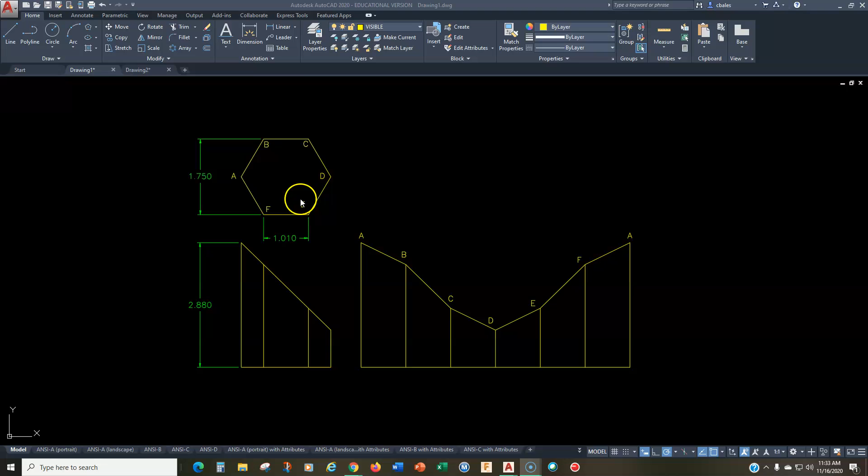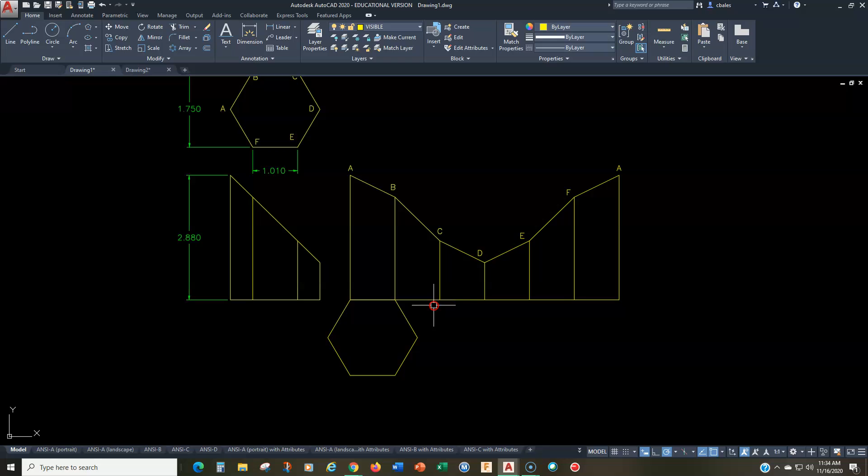All right, so the bottom of the hexagon is very straightforward. The bottom of this is essentially a regular hexagon. We've already created the bottom shape right there. We just have to copy it and move it in location. So I'm going to use the copy command and pick the object right there. And we can choose any of these edges to put it on. So I'm just going to put it right there, because that seems like a logical place to put it. And there we have our bottom.

Now the top is a little bit more challenging, conceptually maybe, to see what we're talking about. The top is a hexagon, that's not doubted. But because it's a truncated hexagonal prism, the top shape is basically a smeared out hexagon. So we have to notice a couple things to get this created properly.

The first thing we're going to notice are the two sides that are equal in length and equal in, I guess you could say, angle. The sides right here, which are basically E and F and B and C. So we can see B and C right here and E and F are equal in length and in angle, okay? So we're going to use that as our basis for the creation of our top surface.

What we also notice is the distance between E and F and B and C is precisely 1.75 inches. That's the width across the flats. It is also the distance between AB and CD and AF, but we're only interested in BC and EF. So that 1.75, and they're parallel. So what I'm going to do first is offset this line 1.75 to create a parallel copy. So I'll go to offset. 1.75 is already there, and I'll offset that line right there.

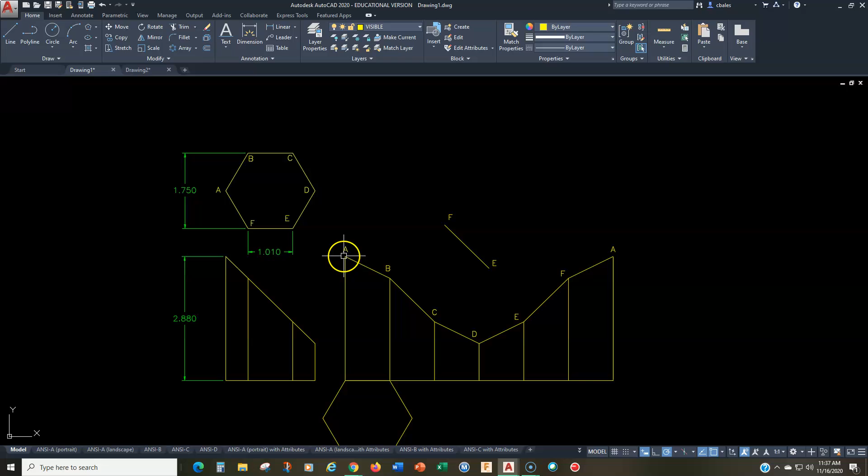Well, if we were drawing this by hand, we would use a divider or a compass, and we would strike an arc from B equal in radius to BA. And we would do the same for F to FA. And since they're the same distance, where they intersect would be where our line ends. We can do that in AutoCAD using the circle command. Okay, so watch this closely. We go to circle center radius.

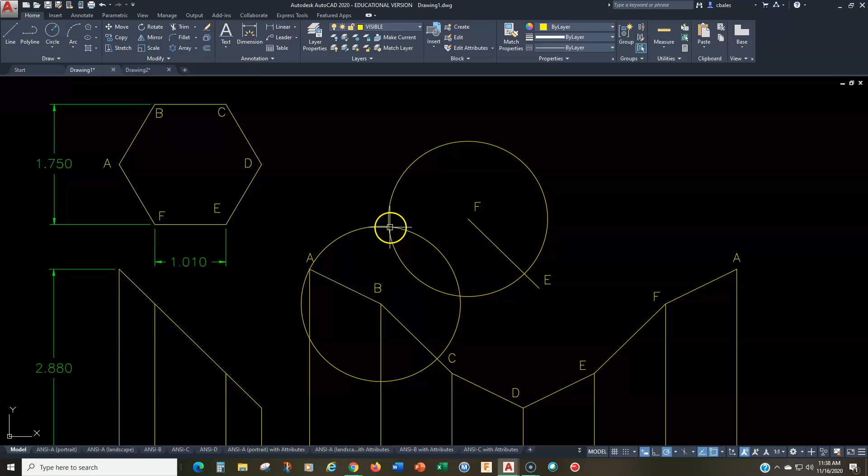I'm going to put my center here, and strike a radius equal to the distance from B to A. Now remember that AutoCAD keeps track of that last radius. So I'm going to hit the Enter key to go back to the circle command, pick my new center right there, and hit Enter to use the previous radius. Where these circles intersect is where the line BA and AF starts and ends. Very simple. So we go from B to A, and from A to F, and then we can get rid of that.

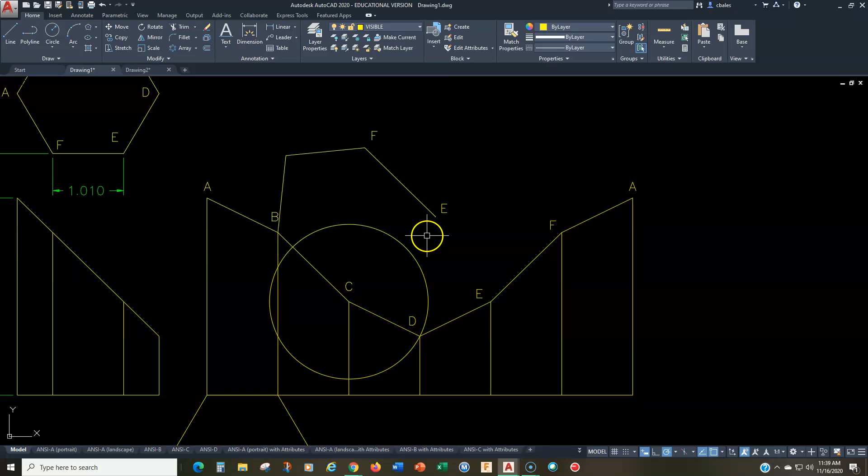And likewise, we do the same for C to D and E to D. So let's do this again. I was going to say it's the same distance, but I don't want to have to prove that to you, so we'll just do the construction again. There we go. We hit the Enter key, pick, and then we draw a line from here to here and here to here. And then we can erase our construction lines, and there we go.

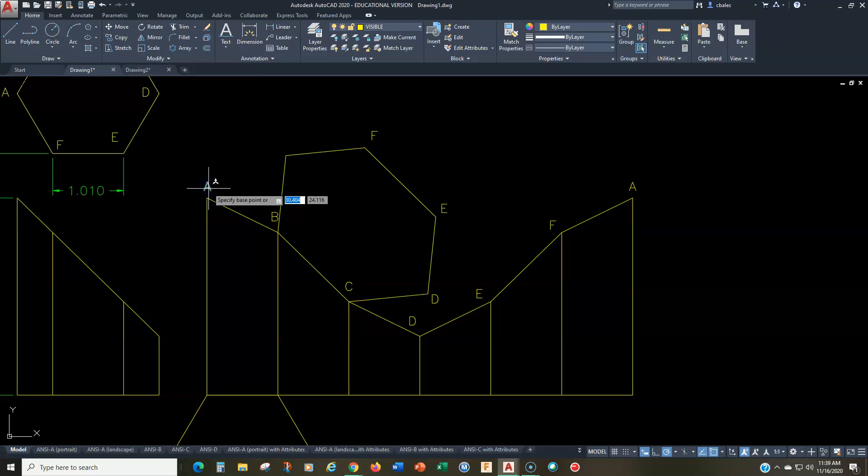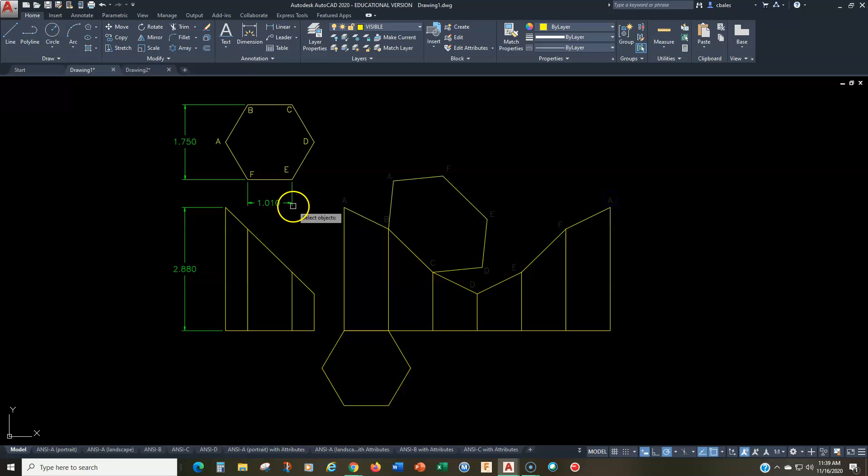Now let me copy this over here again. So this point right here is D, and this point right here is A, and there's our top hexagon. Now let me clean this up because I don't want you to have all this stuff in there. I want to show you what the drawing is going to look like when you're done, and we're not going to have any dimensions on there. There we go. There's the completed drawing.

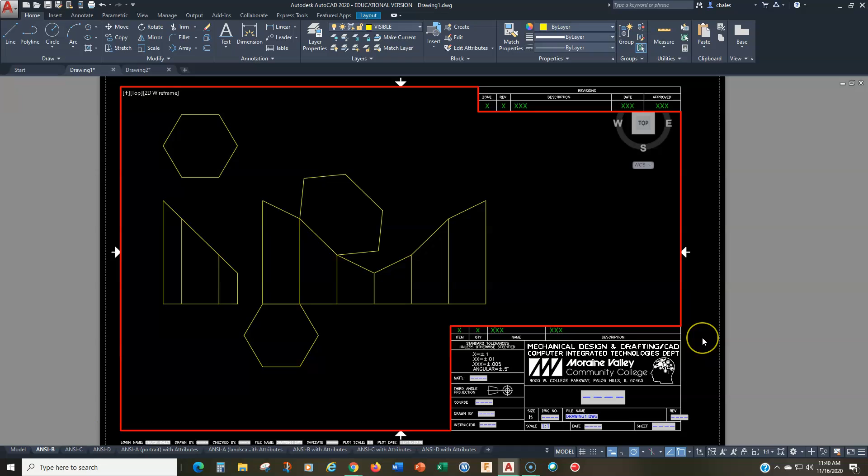Now we're going to print this on a B-size border. So we'll double click in here, do a zoom extents, bring this in here, set the scale. Let's try 1:1. Look at that, perfect. We squidged that over there a bit, and our drawing is complete. So I can lock this. Remember, we're not dimensioning it. I don't want dimensions, I don't want any labels. Just finish the title block and border, and then you're done.

Okay, so that is creating a development drawing of a truncated hexagonal prism, or a hexagon box, as they're called in your book.